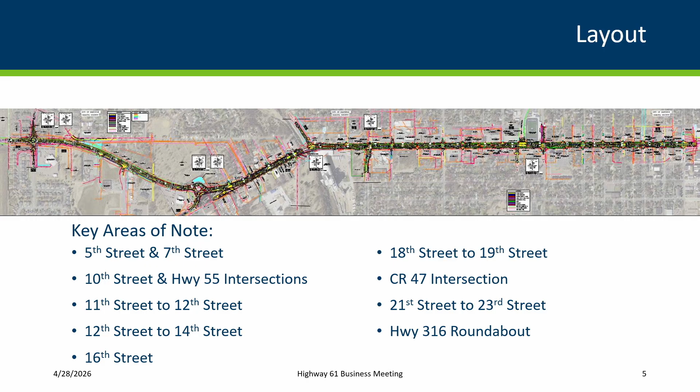So starting out, what we did here is lay them out side by side from the vision study—what we originally thought from the issues and solutions that we analyzed—and then moving to what the layout actually looks like.

Vision study on the left, layout today of what we're going to build on the right. This one shows the 4th, 5th, and 6th area, north end of the project. You can see it's pretty similar to what the vision study had.

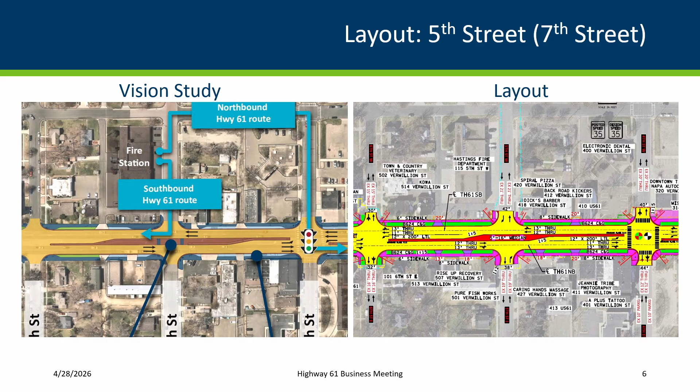Looking at 5th, we put that median in the middle. You can see how that's translated through. We've still got the wide median in there, cutting those left turns off. That'll be for better crossings for people walking across. Still got the signal at 4th.

Moving up to 10th and 55, this was a key area that we looked at during the study. It is a congested area, two signals side by side like that, a lot of movements back and forth. It's hard to get through both signals—or at least I've had trouble getting through both, hitting a red on one of them most of the time. So we were looking at how can we improve the safety and mobility as we come through.

A lot of those elements still true. We're looking at having a right-in to this 11th Street. You can see how that translates through. So you will not be able to go through on 55 into the Walgreens here. If you're coming from 55, you'd have to come in on 10th and around. But what that does is eliminate one leg from that signal, allows that green time to be redistributed, and improves those operations in that area.

Same thing over at 10th—we're turning this into a one-way to the west. You can still turn from all directions there, but there will not be the opposite traffic coming out. That turns it into more of a T intersection, allowing us to redistribute that green time. Between them, we get better operations through there, better safety. It all ties together. So for this one, as we looked from the vision to the layout, fairly similar as we moved from the vision into that engineering.

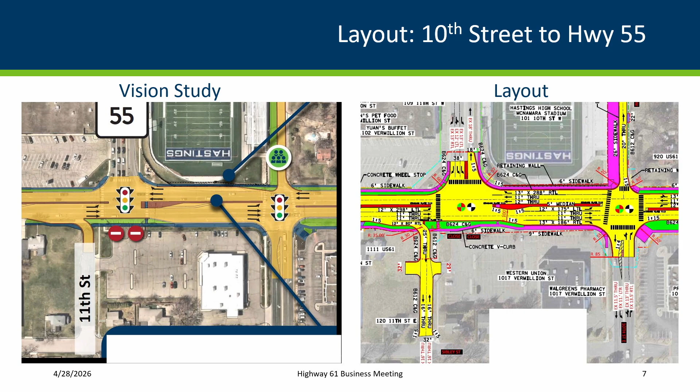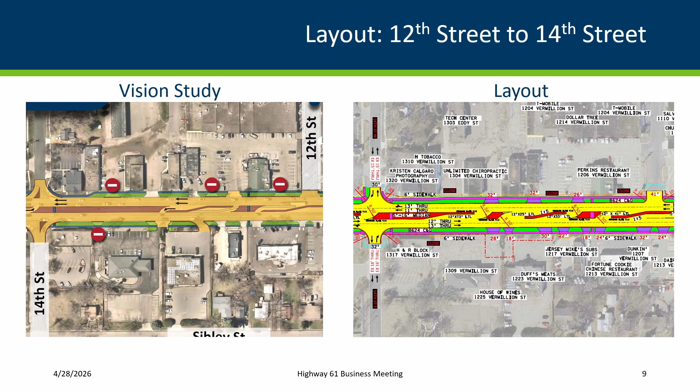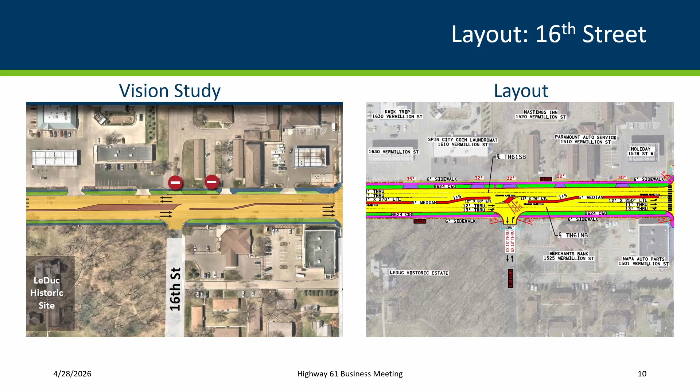16th is another area with some changes. Primarily we looked at this left turn lane, lengthening that to allow people to turn to 16th, and providing this northbound left into the businesses on the west side here. That was something we were considering blocking off. We had some closures up here, and we reopened those based on how the businesses or the traffic flows through here. Again, more conversations with different businesses looking at those routes, trying to make those reasonable changes where we needed to.

18th and 19th. 18th Street is where we're putting in a new signal, and that is primarily for the truck traffic in that area from the mill. There's a lot of trucks that come through there. In combination with that, there were trucks that came in and out of the two driveways there.

You can see it a little better on the left side here. Particularly when those trucks come out, they're blocking both lanes of traffic. That's a big thing we're looking at. It presents an issue for that northbound traffic, so closing those off and redistributing that traffic back to 18th helped justify the signal here. That makes it easier for those trucks to move in and out of 18th and provides that safety and mobility for us. As we continued talking with the mill, one of the changes based on how their traffic flow is...

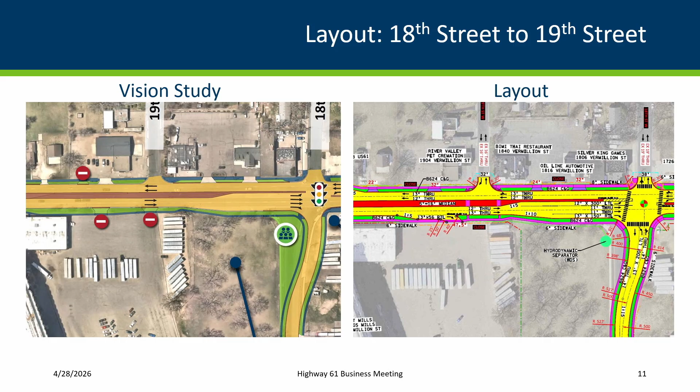We looked at this and evaluated the mobility and safety and determined we could allow a right in this area, have the traffic come in. A bit of change from what we had, but again, trying to keep our goals in mind, talking with the mill about how they move, how their parking lot works, and where their truck traffic goes. One of the changes we made.

At the county road, this is one we had a number of discussions with the county about. They have their own plans for County Road 46, 47. The biggest thing I keep pointing out is making this a right turn lane. I know it's parking there, in my head I know it every time I drive through there, but I still want to pull into it like it's a right turn lane. So we're gonna make that change. We've got that in there.

We originally had this a little straightened out, more of a 90-degree angle. As our engineers looked at it, they were looking at the pathways, particularly for trucks, how those movements come around. Our traffic group also looked at the numbers and whether we really need those dual lefts, and they determined we could get by with a single left and a right. Not quite as straightened up as we went before, but that was based on the paths. And then making that an urban section, adding the trail in there—those are all helping the county with their plans.

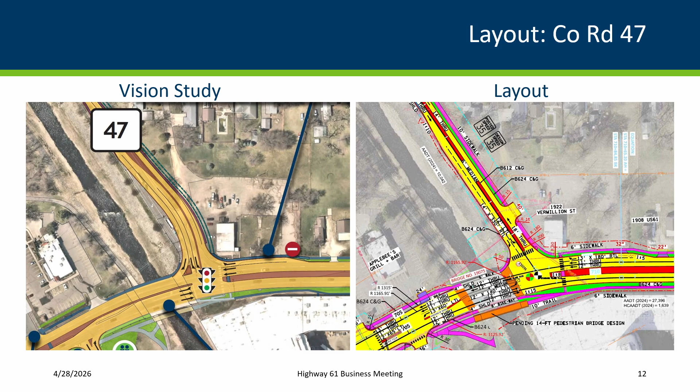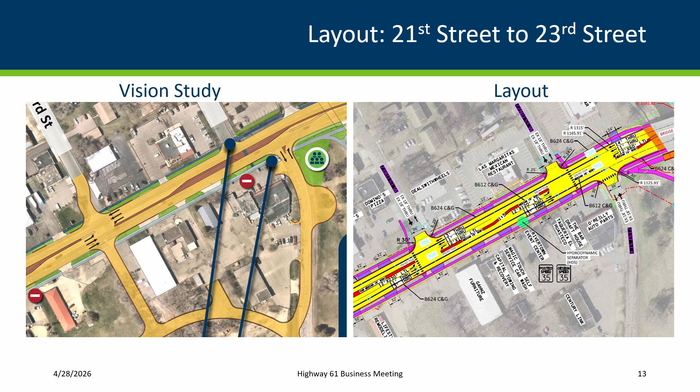So very similar to what we had for the vision study, but in terms of that evaluation process, thinking through our iterations and figuring out what's going to work best, what we can build out there, and moving forward. Those were the key areas I wanted to show up here. We do have layouts that we can roll out after we're done, so you can take a closer look at anywhere more than what we've got here. We're happy to talk, happy to show you different areas, and talk about our reasons for different things.

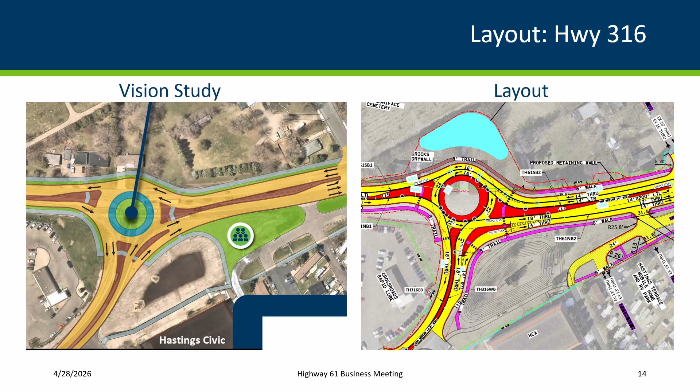Moving on, we're looking at what's the plan with 36th Street roundabout. Not shown here, but we have it in the layout, and we can show you that afterward. Still a single lane roundabout, what we had in the vision plan. We've got that in the layout and people can take a look at that afterward.

Safety, first and foremost - we want to be able to build this safely for not only the people going by, but the workers themselves too. Quality of construction, we want to maintain that, and that gets to a little bit of how much we're constructing at one time, how you break it up. And then very importantly for everyone here, maintaining business and resident access. So we need to maintain access through. That doesn't mean it won't be gravel or not pavement at times, but it does mean we need to maintain access to the businesses so people can get through, and clearly identify how that is going to happen for you.

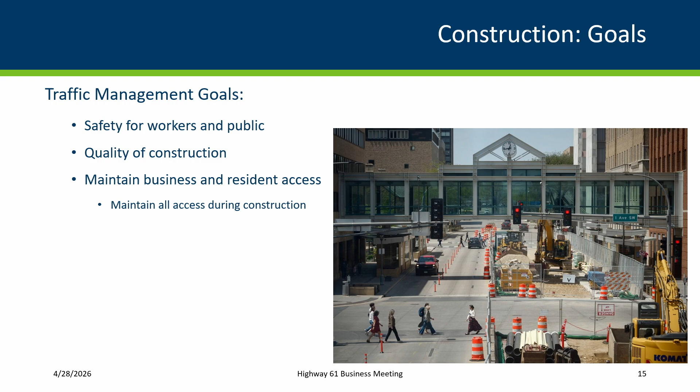So I think I touched on this last time I talked to this group. Big picture, how do you construct it? There's a few different ways we considered. Initially, full closure and detour.

Obviously that's safer, it's fast, you get in there, you can build and go. It's just not feasible. It's a river crossing, people have to come through here. Rejected option, we're not going to fully close 61 and prevent traffic from going there. That's just not something we can do.

On the flip side of that is maintaining full lanes. Could we maintain 2 lanes in each direction and do this? That is where you get into the right-of-way that MnDOT has. Can you shift traffic appropriately? And we don't have the room.

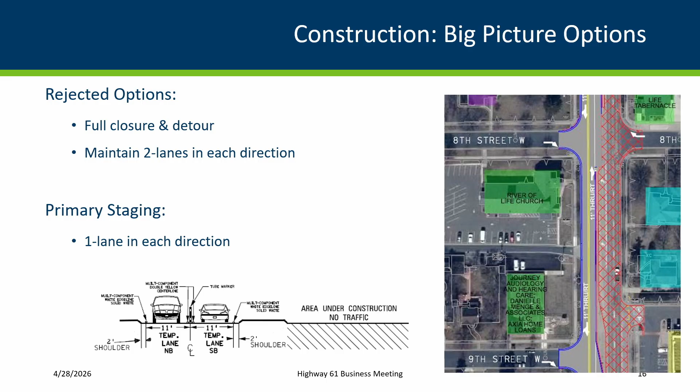That's a key aspect though, and one that, as you're thinking about it, if you want to talk now, if you want to think about it and get back to us - the other way to do this is to break it up into more segments. The trade-off, if you break it up into more segments, is it takes more time. So what we have to try to balance is allowing the contractor to move, get their work done, do it efficiently, with doing smaller segments and trying to get them done in more pieces.

And what does that do for access? How does that work - is it more one segment at a time, a longer segment? There are just options there that we wanted to point out. So currently we're thinking about 3 segments, but again, this is where we can think about it, we can discuss it, we want your input on it.

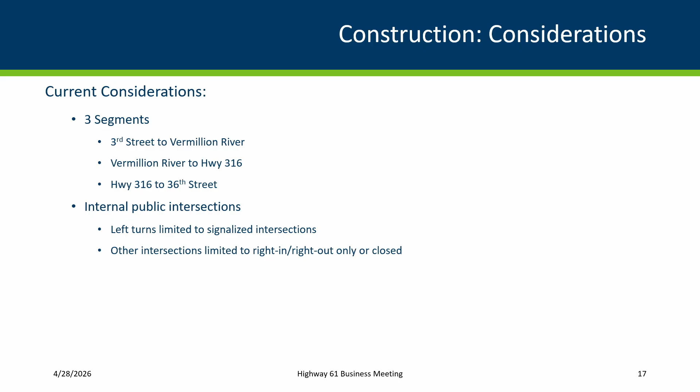It could be closed at times where we need to get in there. Same thing for 6th - right in, right out on one side, right in, right out, or closed, depending. We wouldn't want to close them at the same time. We might alternate how that gets done, but that's kind of some of the considerations and what we're looking at the moment of: do we do a longer stretch like this, one half at a time? Is there only those crossovers at the signalized intersection, or are there some interim points that we need to consider to help with those movements back and forth on the highway?

And we do have a picture of this. It's all preliminary, nothing's been settled yet, but we do have some preliminary aspects that we can show. People can look at in a little more detail. For other sections, you can see what that might look like as we kind of determine how we're going to build this.

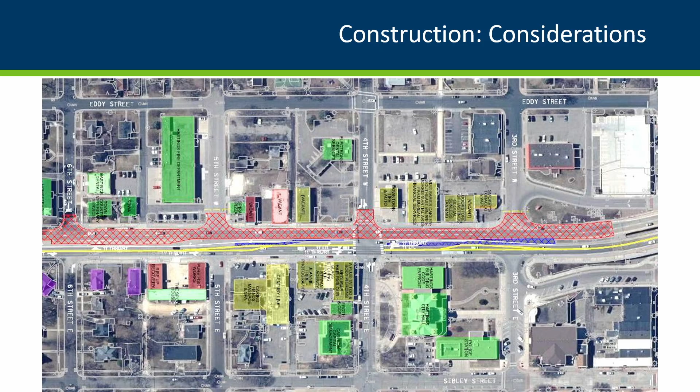All right, so other elements. Do you want to talk a little bit about the utilities? So this just kind of comes back to what I was speaking about earlier. MnDOT's focusing on the geometrics, obviously, the layouts, the access points, et cetera.

A portion of the city project, we're estimating at 30% design here, close to $4 million plus in utilities. We've got 9,000 feet roughly of water main, 9,000 feet of sewer along this entire corridor. We've got about 60 pairs of services to address in the right-of-way as well. So that's quite a bit of utility work.

Utility work comes with at least an 8-foot minimum deep trench, right? That's our depth of water main. Our sewer gets deeper than that along the corridor. So think about crossings, think about stretches of utility replacement. We're gonna be replacing those utilities in kind mostly.

And then when we get down towards 18th Street, we do have Met Council also partnering with the city and with the state on bringing a sewer line down 18th Street for a part of the way, down 61 and down 46, County Road 46 to about Eddy. This is setting up what will be our future trunk sewer line.

Now we currently go to the treatment plant downtown, so we sewer everything to the east. In 10, 15 years, all of Hastings sewer will go west towards Rosemount. So what we're doing is, as the road is opened up, we're kind of taking advantage of some synergy here, and we'll be putting our big trunk line pipe funded by Met Council down that portion of the corridor. So we're going to be adding utilities in addition to replacing some utilities, doing it all at one time. So that's a big portion of the project to get layered in here as well, getting this all done at one time.